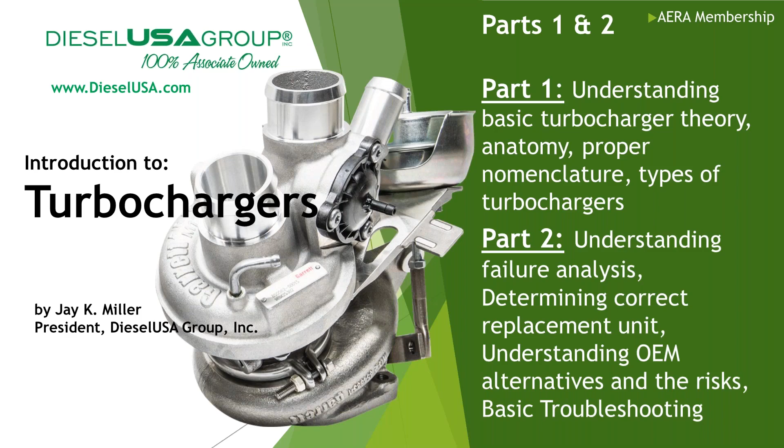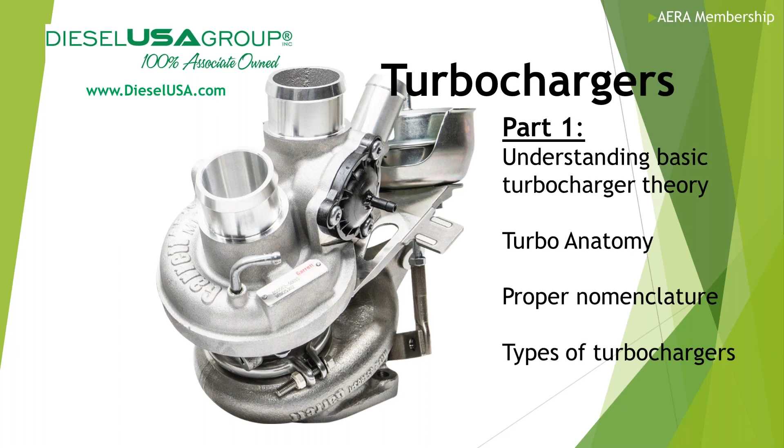So in part one today, we're going to talk about just basically what a turbocharger is and some of the fundamental theories. Then we'll go through turbo anatomy, and I will try to use the proper nomenclature, because the nomenclature dynamic is very important. As you communicate with both industry peers and customers, using the right and consistent terminology will help you more clearly communicate questions or issues associated with a device such as a turbocharger. And then we'll talk about types of turbochargers.

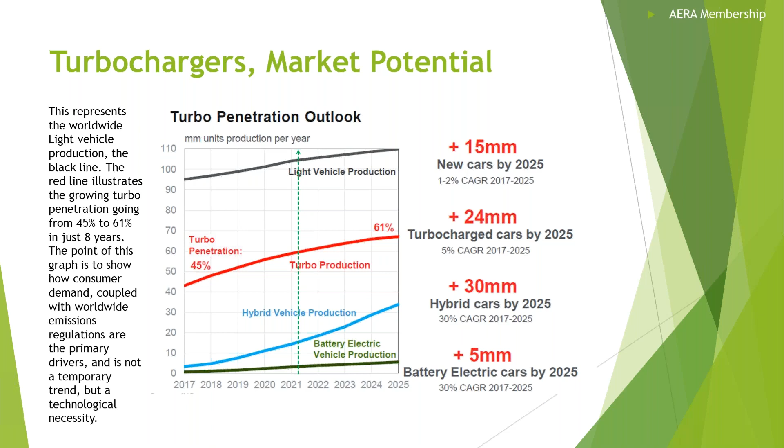This vertical green line represents approximately where we are today. So as you can see, going forward through 2025, the rate of growth is going to continue at the rate that it has been, and that is developing a very, very large potential in the replacement market for turbochargers.

So if we look at that same trend by worldwide region, you can see how in North America there was only, in 2017, about 34% original equipment penetration, and by 2022 it's expected to be as high as 50%. By contrast, if you look at the European Union, in 2022 it was 76%, but in '17 it was 78%.

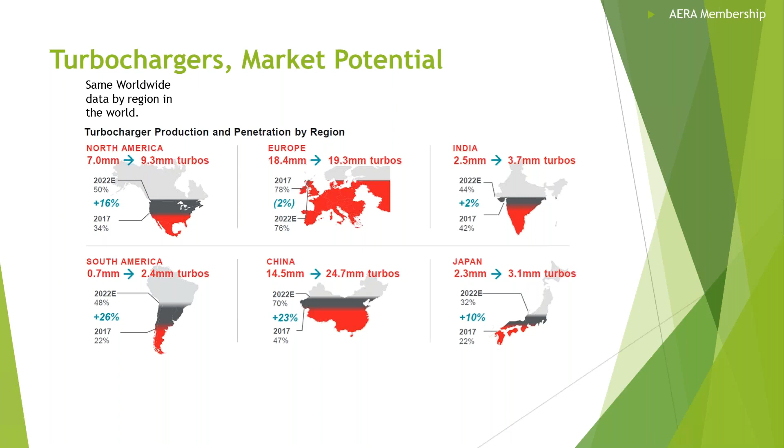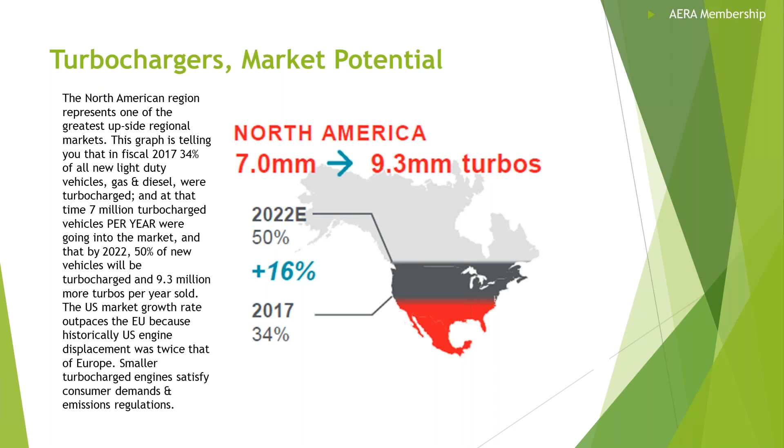That's a negative 2%, but the cause of that is basically the fact that in the United States, historically, engine displacement ran on average about twice that of Europe. Europe has been running smaller displacement engines at higher RPM for many more years, and the turbocharger has been fitted there for a longer period of time. So the real dramatic growth is about a 16% compounded annual growth rate for North America.

So let's start out with just what is a turbocharger. Very simply, it is a radial inflow turbine that takes the energy from the engine's exhaust, present in the form of heat and pressure, runs it through that radial inflow turbine before it goes back out the exhaust, to drive a shaft. That shaft is connected at the other end to a fresh air compressor, and that fresh air compressor increases the volumetric flow and air density for the engine to increase the engine's total mass flow and volumetric efficiency. You must remember that pounds of fuel equals horsepower, but you just can't increase fuel flow without the presence of oxygen to burn it.

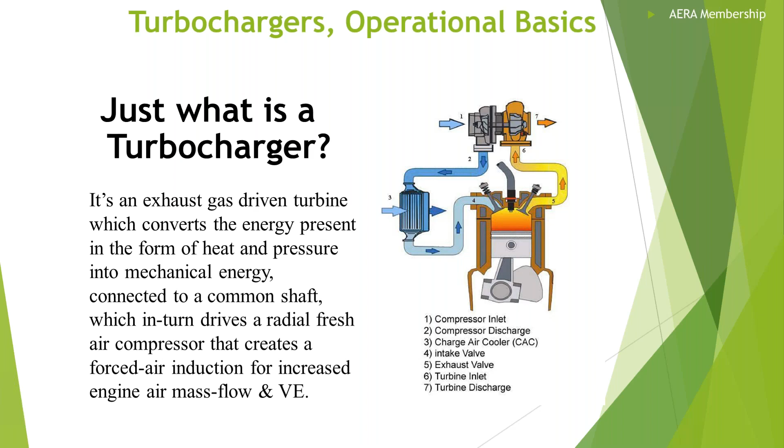So the increase in airflow, commonly referred to as boost, in and of itself doesn't gain you anything. It's an enabler for the increase in fuel flow rate to burn.

From an operational basics standpoint, turbos are a very fascinating device because they're both as simple or as complex as you choose to understand. We're not going to get extremely complex here, but most of your reselling accounts or people that you talk with are not turbo savvy, so I would encourage you to not fear discussions on turbos.

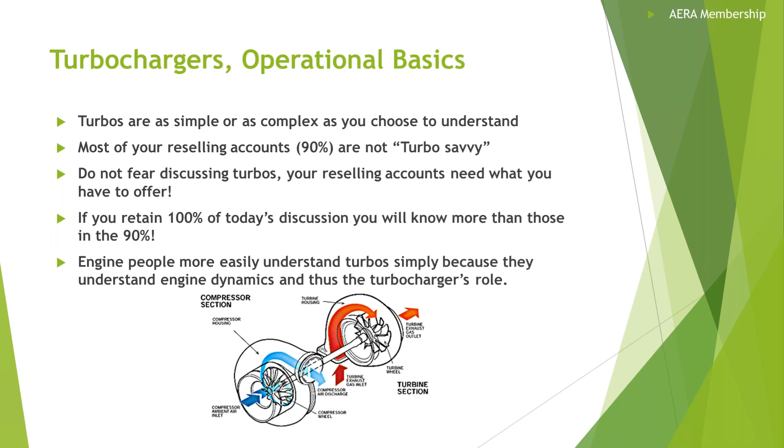Any of you in business, your reselling accounts need what you have to offer. They need to understand this device. If you retain anywhere close to 100% of today's webinar discussion, you'll probably end up knowing more than 90% of the people that you encounter in the marketplace. And this being AERA, engine people tend to understand turbochargers more easily, simply because they understand engine dynamics and the turbocharger's role in aiding engine performance.

So let's start out with turbocharger basics. All turbochargers have what are referred to as 5 major components: the compressor cover, the compressor wheel, the bearing housing, the turbine housing, and the turbine wheel and shaft assembly.

Once the turbocharger is assembled and the compressor wheel is mounted onto the turbine wheel, that's commonly referred to as the rotor assembly or the rotor group.

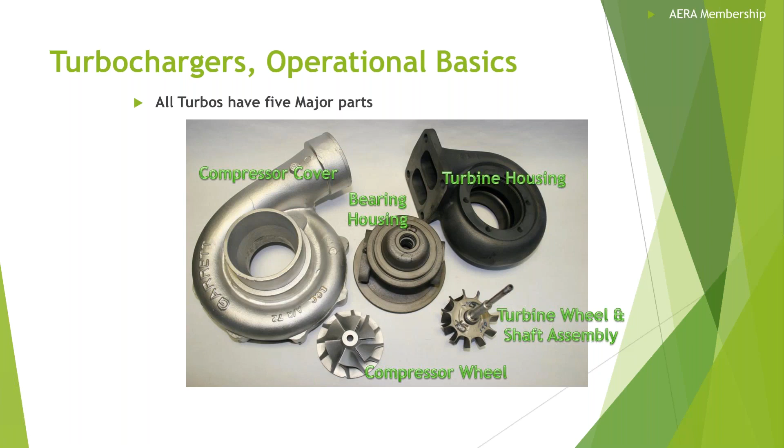So in the operation of a turbocharger, let's talk about it in the three machine areas that a turbocharger possesses. It all starts with the turbine because that's where the energy is extracted. The turbine housing is designed to receive the exhaust gas in these passages, and that exhaust gas flows through the nozzle area of the turbine as it reaches the tip of the turbine wheel, called the turbine wheel inducer. As that high pressure always seeks lower pressure, the higher pressure in the turbine housing expands against the blades to drive the turbine and create rotational mechanical energy.

That is connected through a shaft and a bearing system. But there's also an intricate series of heat dams to isolate the high heat found in the turbine and keep it away from the engine's oil in the area where the bearing system is. You see a heat shield on this particular turbo model that creates a dead air space as a form of insulation barrier, as well as the casting. You also see the cradle of the seal area that is separated and isolates the bearing system where the engine's oil is. It's all very deliberate design, specific in its metallurgical qualities to withstand this environment.

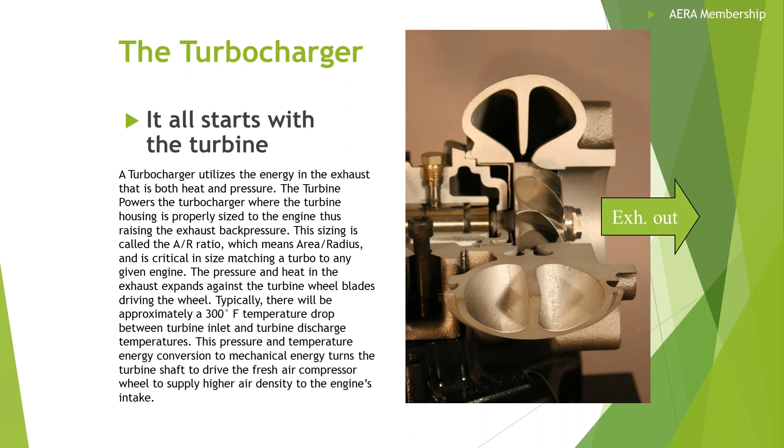The turbine on a turbocharger is perhaps the least understood but the most important in tuning a turbocharger to a specific engine's demand rate. You hear people talk about A/R ratios. Some call it an aspect ratio - I don't like that term, it's incorrect. An aspect ratio is like a 3x5 picture frame.

The A/R ratio is commonly misunderstood, so I want to spend a couple minutes giving you the technical understanding. A is the area at the tongue, and I'll explain that in a moment. The R in A/R is the radius from the axis of rotation to the centroid, or dynamic center (DC), of the volute of the turbocharger - in other words, the RDC. The DC is the point where half the flow passes above and half passes below. So it's the dynamic center, not necessarily the geometric center.

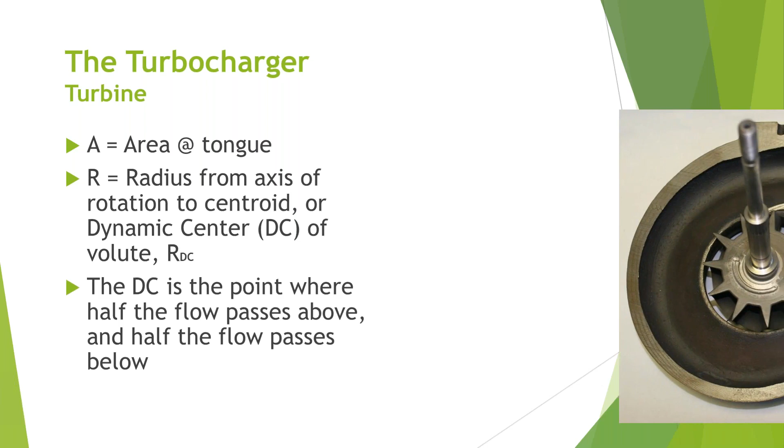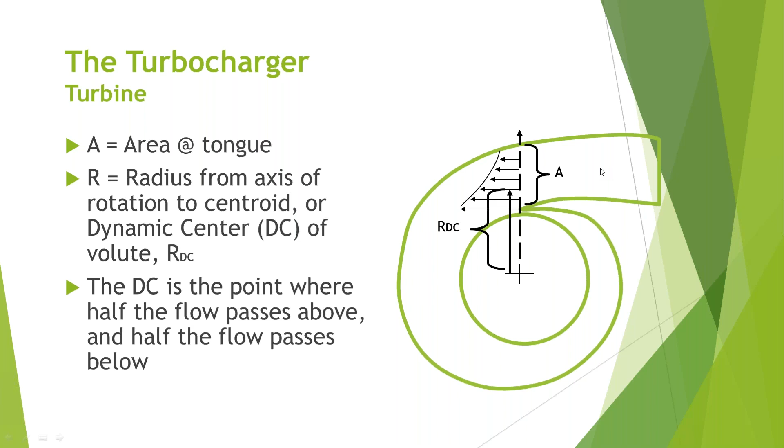Here we have a cutaway of a turbine housing, not normally seen, that is perpendicular to the axis of rotation. The area of the tongue is this area, in square inches or square centimeters - the tongue being the first point where the gas begins to be exposed to the turbine wheel itself. These vectors represent the flow and velocity of the incoming gas from the exhaust stream, and this represents the radius from the center of rotation to the dynamic center of flow. So VT is the tangential component of velocity, and the VT at that dynamic center is the mean value of flow velocity. Another way to look at this is the geometric and aerodynamic analysis.

What's going on in the turbine is you have to understand the engine sees balanced pressure. It wants to see a balance of pressure on the turbine that the pistons work against during the exhaust stroke, as well as the intake manifold pressure. In a perfect situation, your intake manifold pressure exceeds turbine back pressure. The idea of the turbine housing is to be sized to a given engine's specific flow capacity to give it that sweet spot. The best analogy is a garden spray hose - everybody has held one. As you begin to open it, it has a wide pattern because it's mostly closed. If you open it all the way, it goes out in a stream but doesn't go as far as if you close it back a little to reach that optimized sweet spot with the farthest spraying stream of water. That's the best analogy for understanding the tuning of a turbine housing to a particular engine.

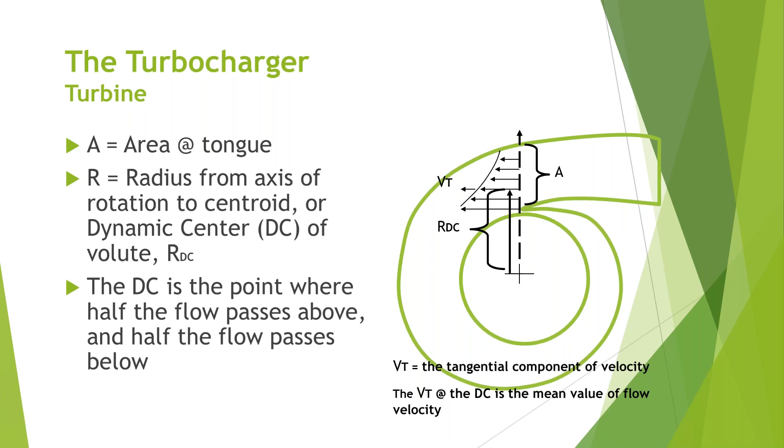In the middle, between the turbine and compressor ends, there is a bearing system and support system, and there's a lot going on here. There are different types of oiling systems - this is what's called a separate fed system. The engine oil is ducted into this intake area, and it's separately fed, meaning this oil galley goes to the thrust bearing area, and there are individual galleys going to each of two journal bearings in this particular case. These journal bearings are an example where each bearing rotates in relationship to the housing, and the shaft - the turbine shaft itself - rotates in relation to the bearings.

Typically, the bearings will rotate at approximately 1/3 of turbine shaft speed, which helps to divide up the speed differential between the relative surfaces. Also, what can be found here are the oil control areas.

Many people talk about a turbo's oil seals. Practically speaking, a turbocharger, with the exception of age-old turbos back in the carburetor days, does not have oil seals per se. A turbocharger controls the potential for oil leak by the control of engine oil.

What's pointed out here in these red arrows is the flinger sleeve that is machined into the turbine wheel neck, where the shaft is usually welded on by electron beam or pulse welding. Then on the compressor end, there's a part called a thrust collar that is either separate or sometimes involved in the same piece.

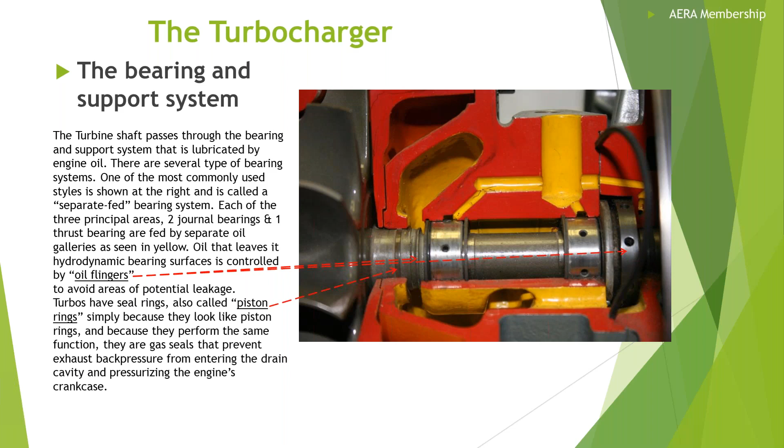Then we move to the compressor. The compressor end is what the engine likes to react to for the increase in fuel flow. The compressor is comprised of two parts, the compressor wheel, of course, and the compressor cover.

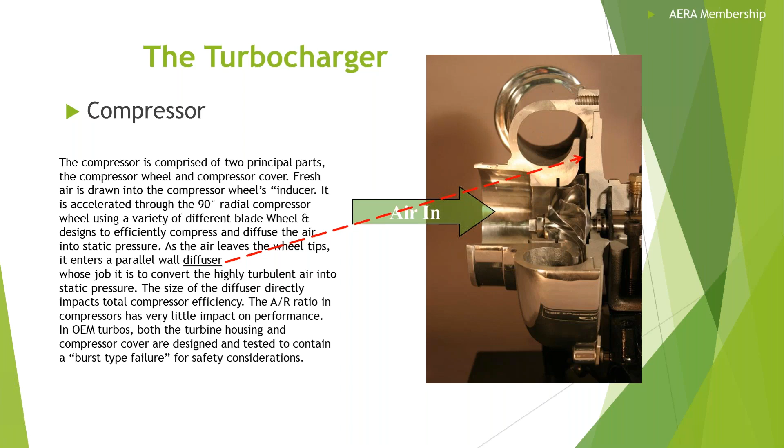The compressor cover has a very important area that has no moving parts and is commonly not talked about, and that is what's called the parallel wall diffuser. Its function is to take the highly turbulent air as it exits this radial fresh air compressor and turn it into static pressure in the volute area of the compressor cover before it is then ducted to either the aftercooler or into the intake manifold.

So when we put it all together, the cutaway of a turbocharger here, you see how it all basically works. Again, the gas entering the turbine housing expands against the turbine wheel blades and then exits the turbine exducer into the exhaust system. The bearing housing and support in the middle, and the compressor wheel, which the inducer is the center here, and the exducer of the compressor wheel here, the parallel wall diffuser, the volute that gathers the air and ducts it into the engine.

It's a fairly simple device to understand, but if you're in the engineering ranks, it's an extremely delicate piece of machinery to design and manufacture.

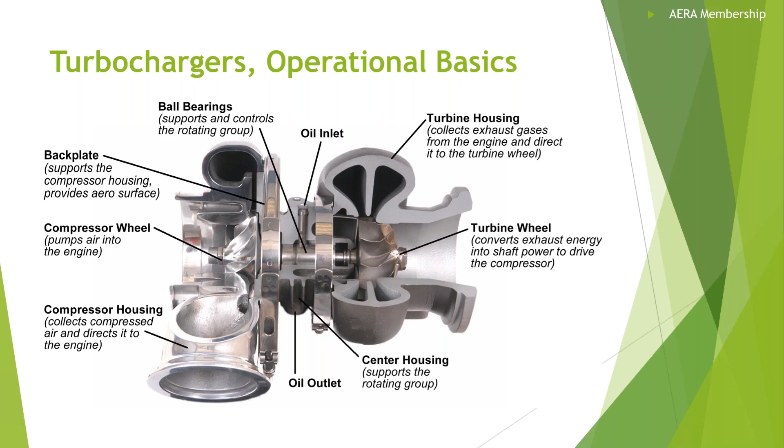Engineering groups in turbocharger manufacturers are commonly divided up into turbine development people, compressor development people, and bearing development people. They specialize in a general sense in each of those areas to maximize the efficiency and cost effectiveness in the development and manufacture of the turbocharger.

When we get into turbocharger types, the oldest type is what's called a fixed geometry.

The types of turbochargers, going back to the importance of the turbine itself, are really defined by the variation of what's going on the turbine side of the turbocharger. In fixed geometry, you have a turbine housing that has, if you will, a fixed swallowing capacity.

That has worked well on classic low-speed diesel engines, including over-the-highway trucks, where they typically run under 2100 RPM. They'll hit peak torque anywhere from 1400 to 1600 RPM. But the lower the speed, sometimes the more valid it is to divide that turbine housing.

So inside of fixed geometry, you'll see what's called an open turbine housing or a divided turbine housing. The divider wall isolates the turbine pulses; there's pulse gas energy in the exhaust system, especially in a very high BMEP engine such as a diesel engine, and isolating that pulse and keeping it from getting diluted such that it reaches the tip of the turbine wheel can raise the efficiency of that turbine to extract that energy.

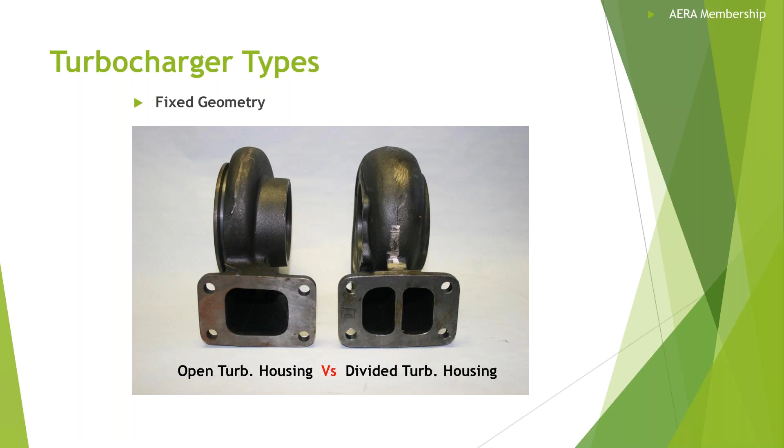Needless to say, during each exhaust pulse, the amount of energy during each exhaust stroke is greater than the amount of energy present between each exhaust pulse. And so that's what the divider wall in a turbine housing is called. Its proper name is a meridional divider wall.

Then you get into wastegates, which is an aptly named device. As its name describes, it sends wasted energy around the turbine itself.

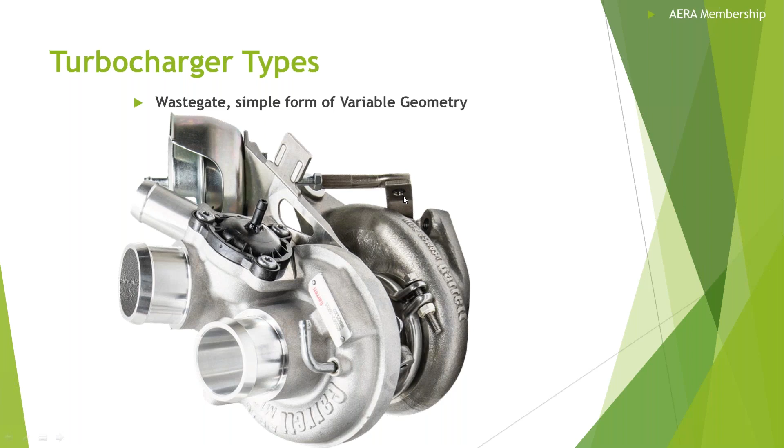It's most easily identified as being typically a smaller frame turbo with an actuator, located right here, and an arm that drives a crank elbow that has a flapper valve inside of the turbine. During operation, that smaller turbine on a higher RPM engine, such as a gasoline engine, is driving boost pressure earlier in the RPM range. But if it's too small, it would build too much back pressure, the pistons would see that, increasing the engine's pumping losses, and you'd get to a point of diminishing return where your turbine pressure would far exceed your boost pressure.

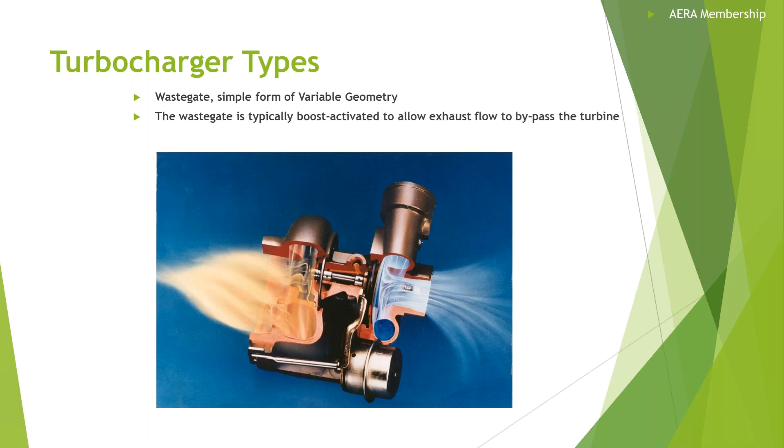So what happens is that actuator is tuned to turn that crank arm, open up a flapper valve, and provide in the higher RPMs the ability for that excess gas to be wasted and go out to the exhaust, thereby bypassing the more restrictive turbine housing, so that the engine's upward RPM range is not limited by the back pressure the turbine housing would otherwise create.

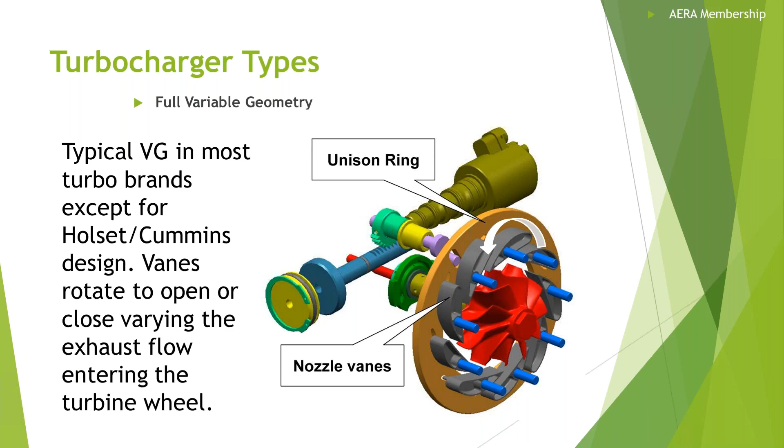That's the way most of the world does it. Holset, on the other hand, the Cummins design, keeps the vanes themselves in a fixed position, as you see here. That has theoretically some advantage, because that angle of incidence where the gas passes through the vanes and imparts onto the turbine wheel tip can maintain its optimum angle of incidence for leverage upon the turbine. It's not extremely large, but there's an estimated 1% to 2% increase in turbine efficiency.

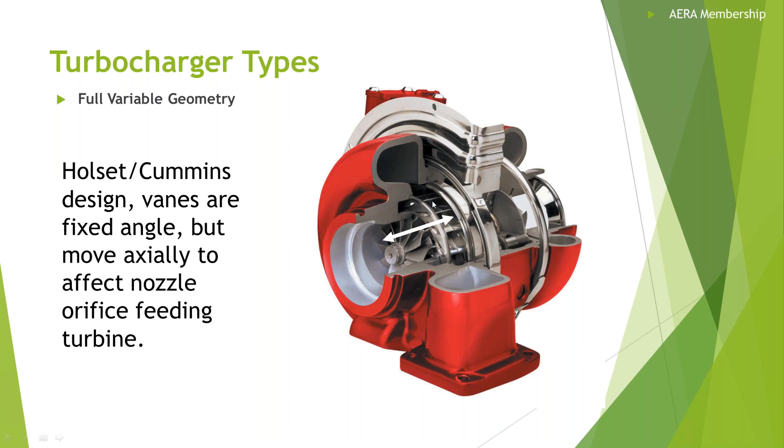And how they then vary the geometry is this plate here moves in and out longitudinally, and that's why the turbine housing is cut out here to receive this vane as it comes in. That then varies the opening for the nozzle area of the turbine housing to feed, and thus throttles the volumetric flow of exhaust gas entering the turbine.

The variable geometries today are actuated by either pneumatically controlled devices, which are more and more passé, and today are typically more an REA, or rotating electrical actuator. This is quite commonly a component that is serviced independent of the turbocharger itself, so it's not uncommon for the turbocharger to be fine—it just needs a new actuator.

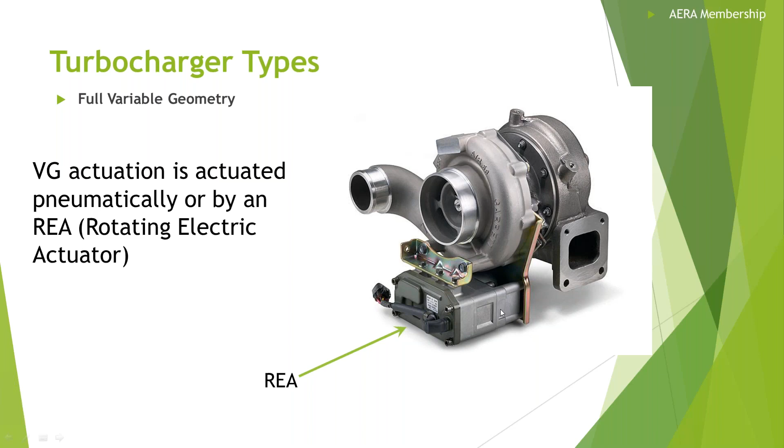And that concludes part one.

Excellent, Rob, Jay. Yeah, really good information. So we did have a couple of questions come in, Jay. On the first couple of slides you had, you were showing a cutaway, and you were explaining the bearings. The question is, what material is used in the bearing, like you had there on the cutaway of the turbo?

Probably north of 90% of all bearings, with the exception of ball bearings—the journal bearings are a bronze alloy. There are ball bearings that use ceramic as well as steel ball bearings, very precise devices for rapid spool up. They tend to be more dominant in the performance turbocharger arena than on commercial.

Okay, excellent. Another question, Jay. If turbochargers are used for greater fuel economy, does it make sense to retrofit a turbocharger on a naturally aspirated engine to even get better fuel economy on that?

The short answer is no. If you're going to retrofit a turbocharger, you're typically going to do it for performance reasons. That's a very good question because it's a common misnomer where vehicles and engines are sold with small turbocharged engines having higher fuel economy. So you take an I4 turbocharged versus a V6 naturally aspirated—the primary gains in fuel economy come from everything associated with it being a smaller engine: less pumping losses, and the accumulated friction of all of the moving parts. The turbocharger is present for one real primary reason, and that is to boost the total horsepower output of that four-cylinder to equal the horsepower output of a naturally aspirated V6.

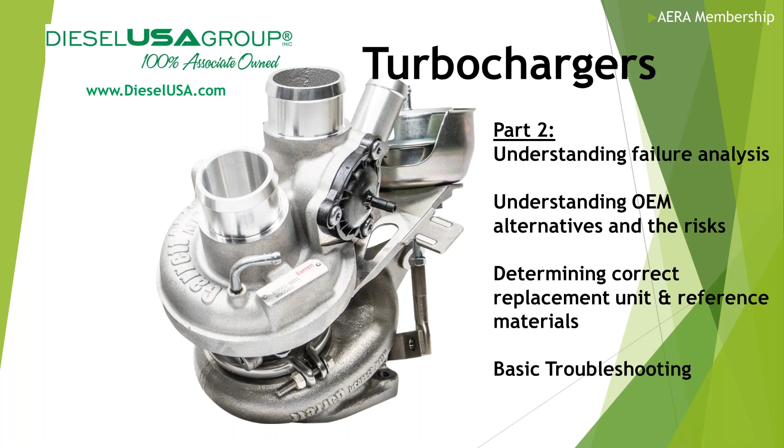It's just a choice. If I was going to do a twin turbo, I would want to basically make two separate turbo systems to control that. But they both, of course, compressors feed the same plenum.